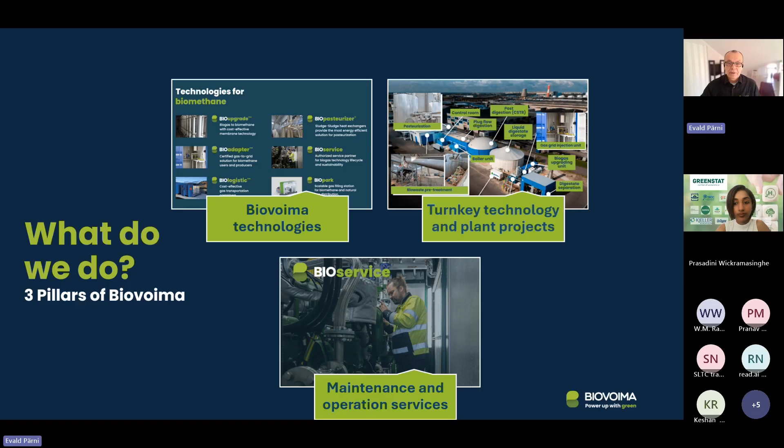Quick turn about technologies: we have bio upgrade, which is actually membrane cleaning - I will tell about that a bit later, we do that ourselves. Then we have bio adapter, which is a unit needed for grid injection. There is usually some kind of measuring gadget inside, a chromatograph, which measures the quality, and there is often also pressure reduction, or depending on the grid, there could also be added a compressor.

Biologistics is actually the transportation solution with the containers. There are different vessels - could be steel vessels, which are cheaper, or composite vessels, which are more expensive but you can transport more. The pasteurizer is the sludge heat exchanger, needed for the pasteurization.

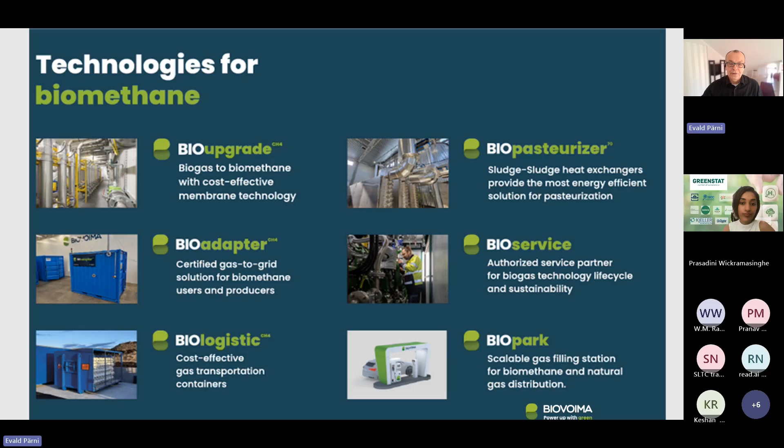And why pasteurization is needed, I will tell a bit later. Obviously, then we have service, we have filling solution, and now we have developed our own CO2 liquefaction solution. And maybe something we have done in Finland, we built a biogas plant for a water treatment company using sewage sludge, making biogas for their own needs.

Sometimes they also use the oil from companies if they can get it, to make more production. Then in Estonia we have built a plant which works purely on bio waste, meaning bio waste coming from households and bio waste coming from businesses.

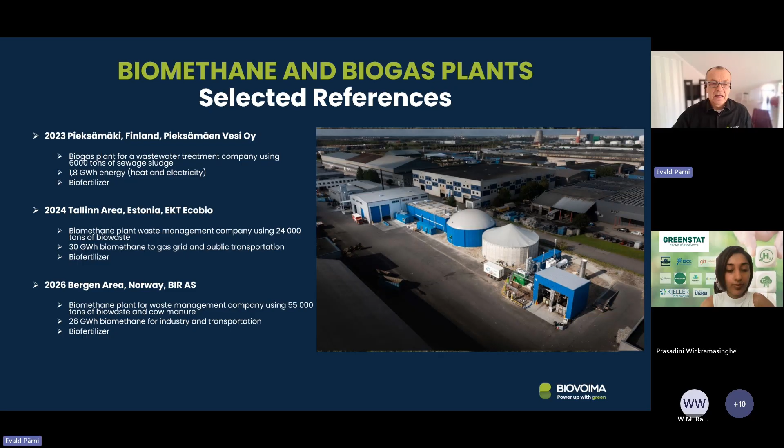And then we have just finished one plant in Norway, and this is an interesting plant because it combines bio waste and manure. Both are coming from an area of about 100 kilometers, and we collect them there to make biomethane, which is used for business purposes. Production companies are using that, and also transportation.

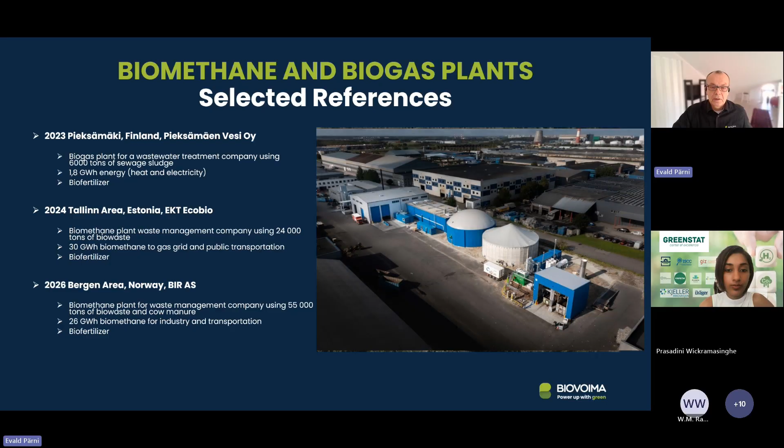As I didn't know the level of knowledge about biogas and biomethane, I put in some basics. Usually people say biogas, but actually biogas is a mixture of methane, CO2, and small quantities of other gases. This is what comes up after anaerobic digestion, and then if you clean it, or upgrade it as we say, you get biomethane, which is actually the same as normal methane or natural gas.

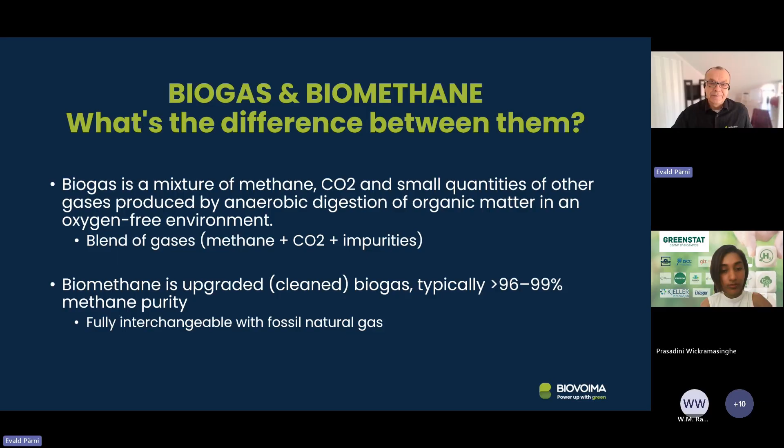And actually cars are not running on biogas, but they're actually running on biomethane. So this is the difference. Because, why actually use biogas?

Obviously, that is one of the best, most sustainable ways to manage large organic waste streams. It's a big problem in the world. And then there's conversion of that waste to energy, which, as we know what's going on in the world, is very important. And then also reduction of dependence on fossil fuels, so you have your own emergency or daily supply. And then also landfill space, because in a number of countries there are huge areas under landfill, and that's a huge problem. As you reuse bio waste to generate energy, you can reduce the landfill space needed.

And then also local value retention. You make local jobs, there will be that kind of stuff, and the money stays in the area. I think it's quite important.

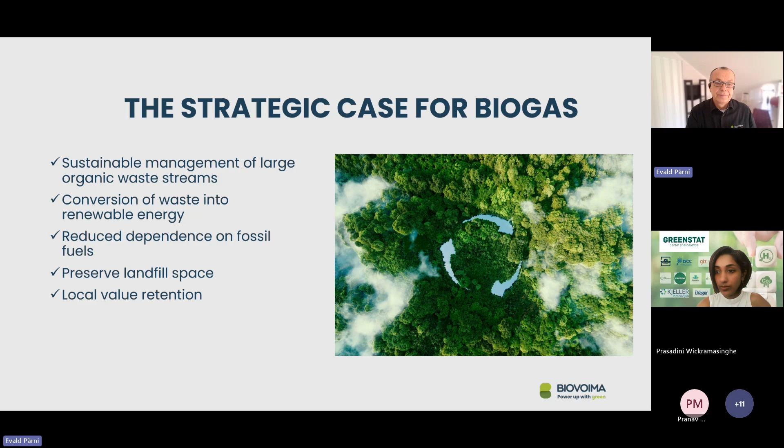And that's why we say you're not just having biological waste, you're actually managing an energy asset. That's something to think about, because normally people don't look at it that way. And if you look, we can basically use all biological waste, whatever it is - manure, wastewater sludge, food waste, or some other organics.

So we can take all that, digest it, and make biogas from it. Biogas you can use directly to produce heat and electricity, or you can upgrade it and inject it to the grid, make it vehicle fuel, or for other business needs. And if you use food waste, you usually have plastic reject, and you can reuse that plastic reject to produce new plastic products.

And then there's digestate - this is what's left after the process. You can use it as a fertilizer. If you separate it, the solid part you can use as animal bedding, or bag it and sell it in hardware stores or wherever fertilizers or soil are sold, and also other products. So there's a lot of ways to use, a lot you can get out of the waste.

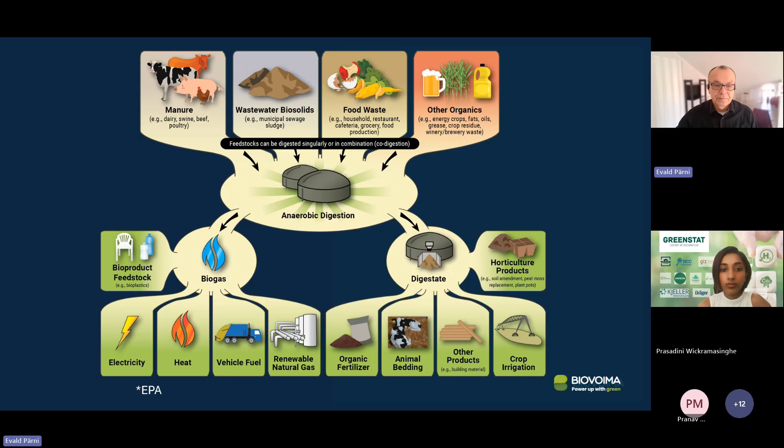And basically, if you look at the process, the start is the same. You have waste collection, which obviously depends on what kind of waste. Then you have pre-treatment, and pre-treatment varies - if you look at food waste, the pre-treatment is more complicated, and unfortunately more expensive. Then if you look at agricultural waste, for example, the pre-treatment is much easier.

And then it goes to anaerobic digestion, and then the biogas can go directly to a CHP, which is basically a big engine where you can make heat and electricity, or you upgrade the biogas and clean it - we'll tell about that more later - and then you can inject the biomethane to the grid, or use it as fuel, or liquefy it, and also after upgrade you can produce liquefied CO2.

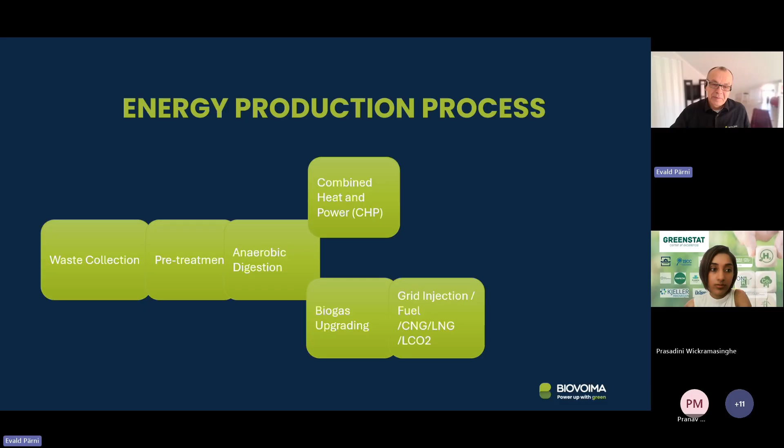Then it goes to digestion, because here we have the reactor, what we call a plug flow reactor. The benefit is that you can use material where the dry matter content is up to 20%, because if you go to wet digestion it's 15%, and then gas reduction is bigger.

The material is moving through to the post digester, and it stays there about 43 days total. After that, the material goes to the digestate, then to the separation where solids are separated and sold as fertilizer, and liquid goes back to the storage tank and is partly used in the process. This liquid fraction could also be used as fertilizer. And the gas obviously is going to the upgrading.

Here is a small upgrading unit, it's called PSA, and it's upgrading the biomethane. Biomethane either comes from that small container, there's a grid injection unit where it's injected to the grid, or - the picture is a bit small - there's also the possibility to fill trucks, because this waste management company running the business also has waste trucks running on biomethane.

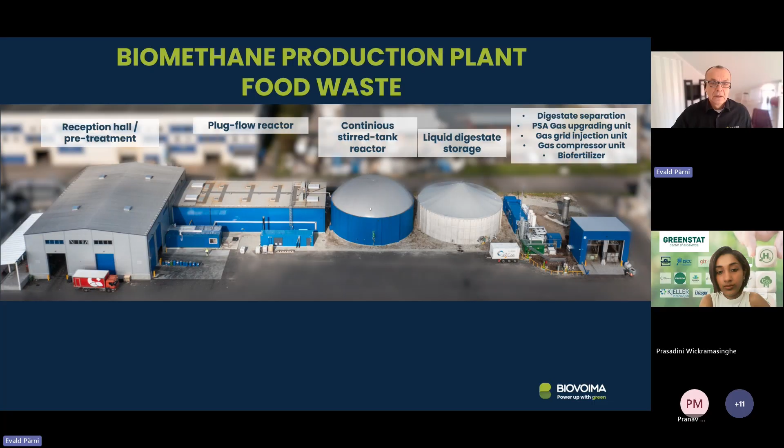And then, as you see here, is this CNG container, and this is taking the gas to the city bus terminal, where city buses are using the biomethane. I think in that city called Tallinn there are about 450 biomethane buses in the city, so they are very much into that. Now let's see that same thing in the picture, what I just told you.

And now we are going to, let's say, the topic of the day. So we're talking about the upgrading technologies and what are the practical considerations when you go to upgrading.

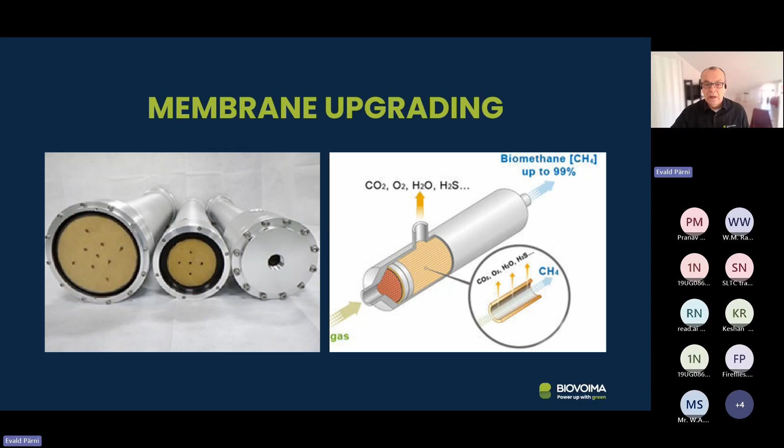And CH4, as a big molecule, just goes through. In real life, they look like this. So this is probably one of the cheapest ways to upgrade the biogas and clean it.

The other thing is PSA. PSA costs more, and basically if you look at the size of the plant, then probably with membranes you can go with quite small production, up to 100 cubic meters per hour. With PSA, the minimum is 500, and PSA costs more. But the logic of PSA cleaning is there are molecular sieves inside the vessel.

Basically, gas is pushed through under pressure, and those sieves capture H2S, CO2, and water, and biomethane goes through to the storage vessel. Then if one vessel is full, they switch to the next vessel, and a vacuum sucks out CO2 and other gases from that vessel. So it works this way.

The good thing with that is it consumes about 30% less electricity than a membrane. But again, it's more technical, more complicated to service, and it costs more, about up to 40%. It depends a bit.

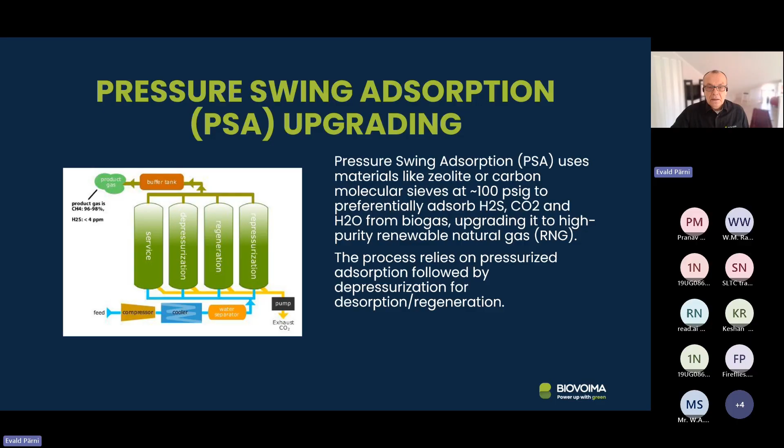And then if you're thinking of starting to produce biomethane, the first thing you have to think about is what technology to use. First thing is the size of the plant - different technologies are suitable for different sizes. If you have small plants, basically there are two options: membrane separation or water scrubbing.

In some countries, water scrubbing is popular, but you need a lot of water. Even though you can recycle that water, in a number of countries that's still a no-go.

For medium-sized plants, PSA and the membrane system are both excellent options. For large-scale plants, the same PSA and membrane apply, but also chemical absorption.

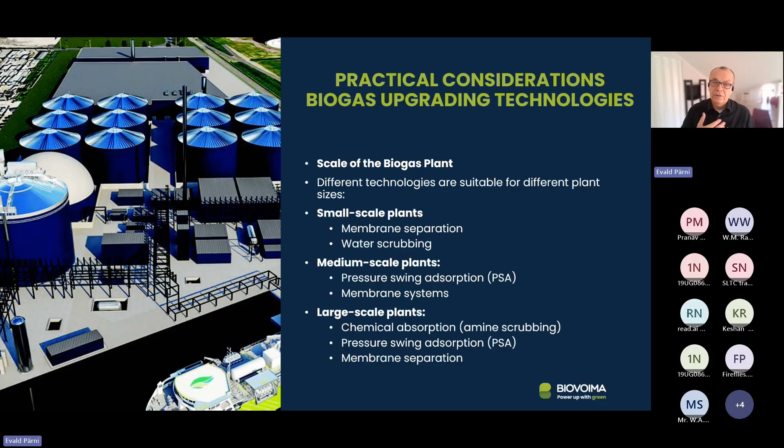Scrubbing is very good. You can get very clean biomethane from that, but you need quite a big production plant to make that economical, because there is a lot of operational cost involved.

One big thing is operational cost or energy consumption, because upgrading requires gas compression, meaning you have to have a compressor, which uses energy. And then you need to pump in the solvents or regenerate absorbents, in amine scrubbing for example.

So that's why it comes back to thinking: what is more important for me, OPEX or CAPEX, or to be somewhere in between?

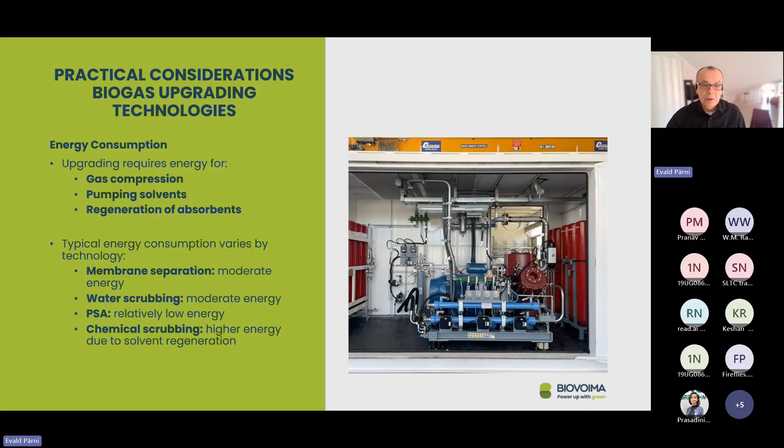If you look at membrane separation, it's moderate energy, same with water scrubbing. PSA has about 30% lower energy need than membrane separation, but it costs more. Chemical scrubbing is very good for the very big plants, but again a lot of energy is needed, especially for regeneration, because there should be temperature up to 140 degrees.

And then you shouldn't forget that everything should be operated and maintained. So you have to consider the complexity of the system. Can you have skilled people for that, or do you train people? How long does that take?

Usually we say that the best people to do that are people who have been in some kind of process production, because this is actually the production of the biomethane. If you go from scratch, it's an even more difficult process, because there's a biological part involved.

And then, what is the maintenance frequency? How much does it cost, and what is spare parts availability? How easy can you get them, or should you calculate having a certain stock for spare parts? But that just costs money because they are laying on your shelf.

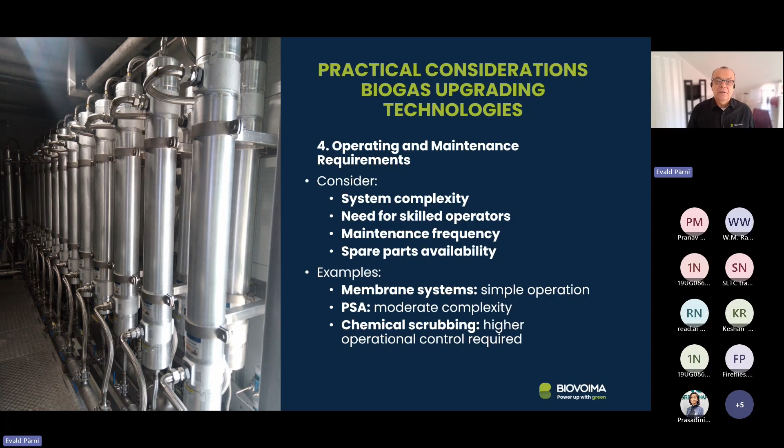You're wasting your time. For example, membranes are quite simple, not too much maintenance. PSA is moderate complexity, but again quite easy. Chemical scrubbing, because high temperature and chemicals are involved, needs higher operational control and more skilled workforce.

Then you have to consider methane slip. Methane slip is a loss of methane. Chemical scrubbing has very low, almost zero methane loss, but all the other processes have some methane loss. Even though it's a small percentage - 0.5% for membrane, 0.5 to 1% for PSA, 1 to 2% for water scrubbing - it's still money you are losing, because it's going out from the system with the CO2 and H2S.

So it's something to consider, especially when you have bigger production. 1% or 2% by the end of the day could be quite a lot of money. Something to consider again.

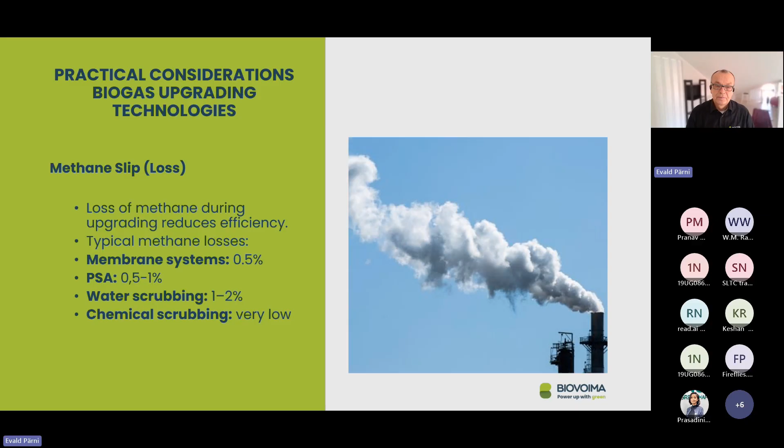And then, as we already mentioned, water and chemical scrubbing - the consumption of those materials matters, because in some areas water is not so easily available. For example, water scrubbing used to be very popular in the United States, because they don't have issues with that.

Chemical scrubbing requires chemicals. One thing is that they are dangerous. Another thing is the availability of the chemicals and the cost of the chemicals, because there are a bit different chemicals that could be used. So that is something you have to consider.

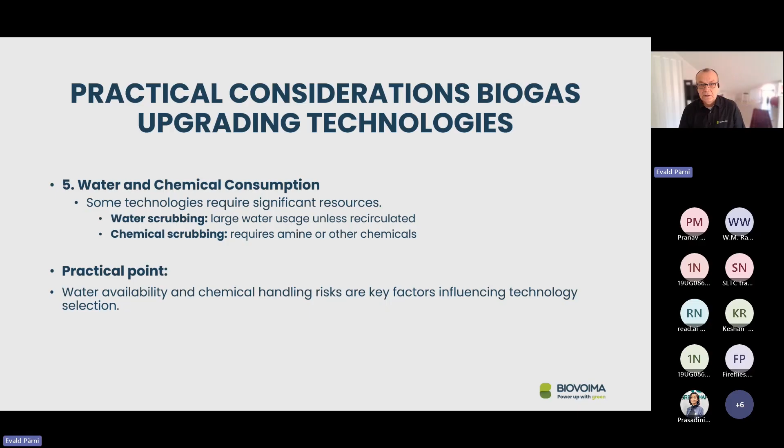All those things influence your technology selection, and then also the capital and operational cost. What is your strategy to find some kind of balance - more focused on as low CAPEX as possible, or as low OPEX as possible?

I have seen different approaches in different markets and by different entrepreneurs. In some very mature markets, they say, to build the best we can, we want as low OPEX as possible. In other markets, they say, let's save there, and they even try to build something themselves - there are issues then, but they try to bring the CAPEX down.

And then, what is your local energy cost and the maintenance cost in the area? How much does that influence your business?

So, for example, the membranes have low capex. Chemical scrubbers have high opex because energy consumption is very high. And, as mentioned before, even PSA has higher capex but lower opex.

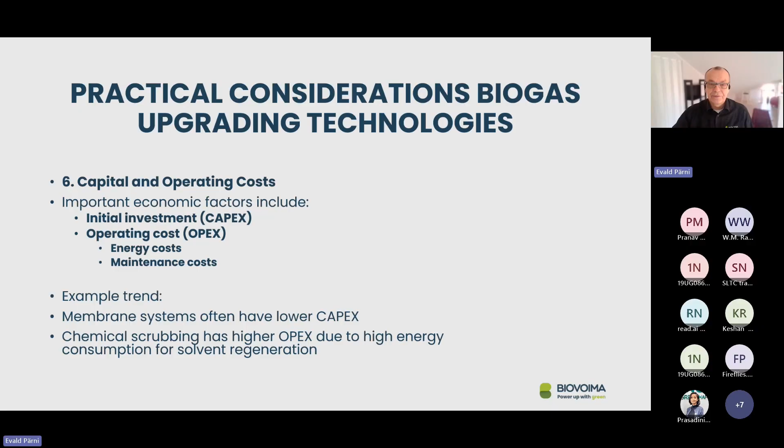That was very quickly about upgrading, because it's a huge topic and we could spend a lot of time there.

If you look at viability and commercial and market drivers, basically where you can make money: you can make money by selling gas, biogas, or biomethane. The easiest thing is to sell it to the grid. You can also compress it like CNG and sell it in containers somewhere - that compression is a bit more expensive.

We call that a virtual pipeline. It's a bit more expensive because you need an extra compressor to compress the gas into the CNG container, since pressure up to 250 bars is needed. Then you can liquefy it and sell it as LNG. As you know, Qatar used to be a huge LNG seller, and now there are some issues, so if you have LNG in your own backyard where you're producing it, it's very handy right now.

There's also big business in environmental credits, because you're from different countries - in some countries this is a business, in some it's not. You can sell certificates and carbon credits, which is a big business in Europe. And if you're a waste management company taking in bio-waste, you can make additional money from the gate fee.

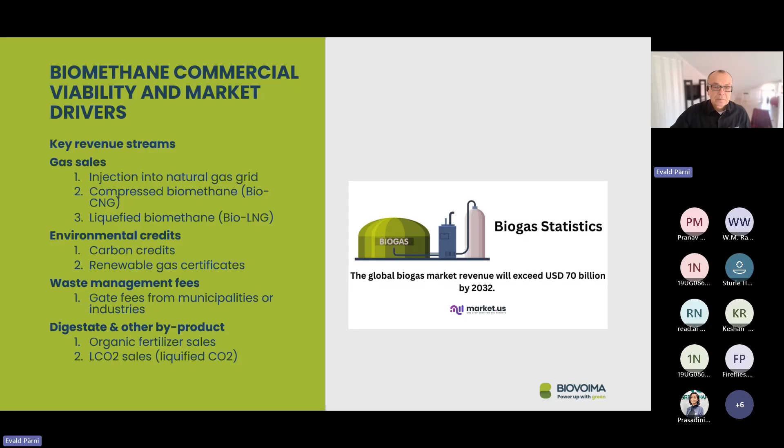Going a bit more into detail, in countries with decarbonization targets, there are carbon prices that affect the price of gas, and also corporate goals, especially ESG - environmental, social, and governance goals. Companies try to be green, and that affects the price.

For example, in Europe, the highest price is for biomethane produced from cow manure, because in a way it's already a fertilizer, but it's also an issue - especially now, with big farms producing a lot of manure with nowhere reasonable to put it or transport it, plus the smell.

Energy security is a very hot topic right now because it reduces reliance on fossil energy, and that's helping a lot currently. We don't know what happens in the future, but it's very good to have that kind of production in your backyard, and it also reduces local waste quantities - so from waste you actually make fertilizer and energy.

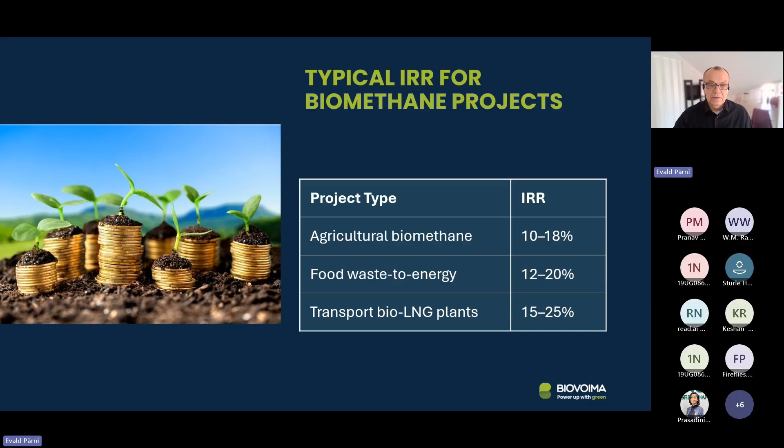At the moment, Europe is one of the leading regions, with about 50% of total production happening there. It has a lot to do with big countries like Germany, where almost every German farm has biogas production. They use the energy to produce electricity and heat instead of buying it from the grid, because that costs more, and they also get rid of their manure.

Then there's how you integrate the production, or how you get the gas to the buyer. There are two ways. One is direct connection to the grid or pipeline, and the other is what we call a virtual pipeline, which means you compress the biomethane into a CNG container and send the container somewhere to be offloaded.

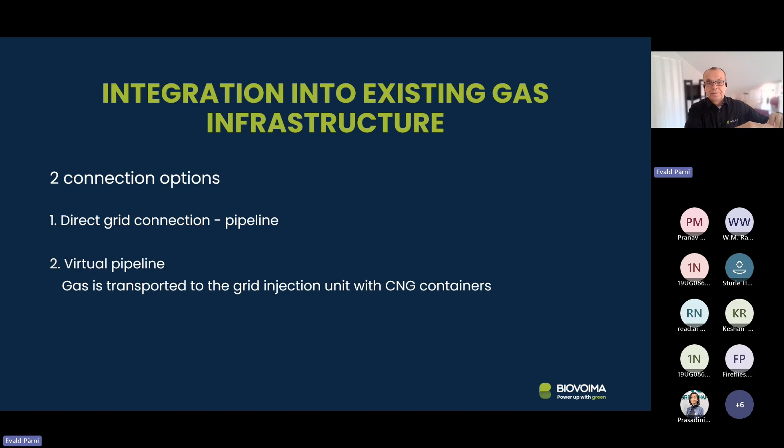The grid connection unit is simple in a way, but it's quite expensive, because it depends on the country and the demands of the grid operator. The standard is that you need at least a chromatograph, which constantly monitors the gas quality, because it's going into a grid with natural gas, and there are components, especially oxygen, they really look out for. You also have a pressure reduction unit, or if you have a very high pressure grid, you probably have to have a compressor after the container.

That kind of grid injection unit, or if you use it to offload the CNG container, you also need heating units, because if you offload the gas from 250 bars, it gets very, very cold. So basically, this is the kind of equipment you need to get it into the grid.

In some countries, it's more technical, which means more expensive. In some countries, it's easier and cheaper. And they are obviously fully automatic systems, you can monitor and adjust them remotely. So from that point of view, they are very high-tech systems.

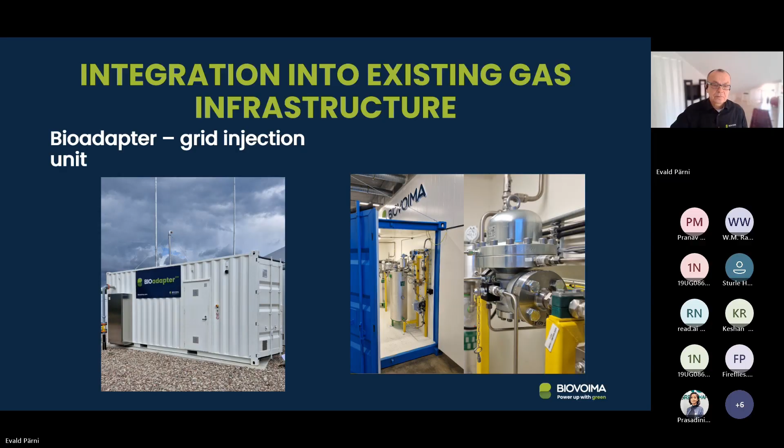We are almost finished. But if you take it all together, what are the key benefits of biogas or biomethane investment? First, waste: we turn waste into clean energy and get rid of it. And then, we can have our own fuel, independent of fuel companies and their pricing strategy, and we can improve the energy security of the country.

Then there are financial returns and operational savings. It reduces landfill and fuel costs if you don't have to take the bio waste to the landfill. You also get a new business, a new revenue stream, selling energy and fertilizer, and as I mentioned, less dependence on fuel. Then there's cutting greenhouse gas emissions, and creating more local business, local jobs, and local infrastructure.